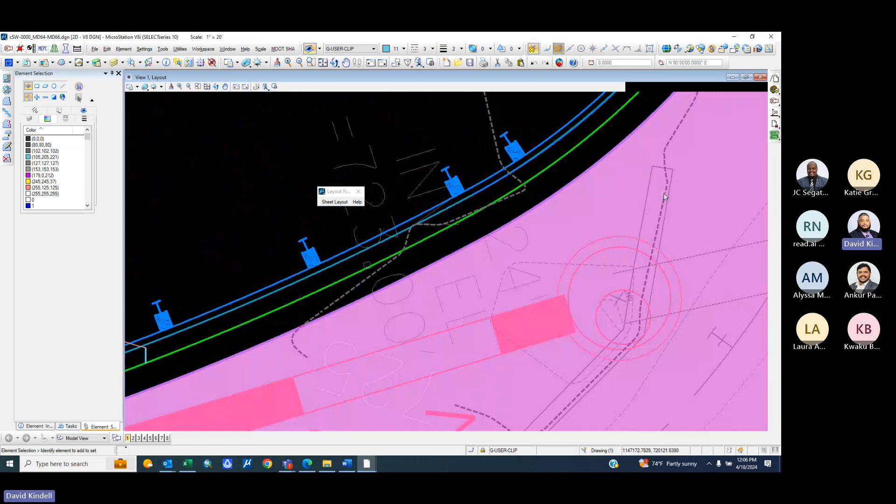So in proposed condition, we're adding a 5-foot shoulder here, and because we're adding pavement here, this existing headwall has to be removed. So we need to figure out how we're going to get the runoff from this road into this microbioretention and into the storm drain system here. Okay?

And so we need to do a pipe system connecting this here. So we added a curb opening inlet here to get the runoff coming to here. Okay? And then we have added inlet, manhole, and pipes to connect to this system here.

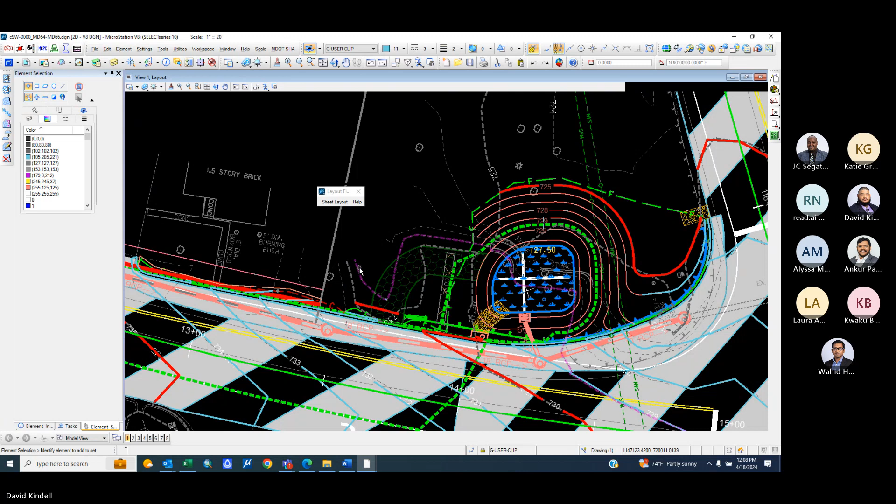So for concept, really all we do is just assume a pipe size. We just throw in the pipes, and that's it for concept. But when we get to the next submittal, we have to draw profiles and make sure that the pipe will actually work. Okay? So the quickest way to do that is using the Power InRoads drainage database. Okay?

So first thing first is you want to work in your InRoads folder, okay? And you want to create a DGN file inside the InRoads folder. This is the file you're going to be working in Power InRoads. Okay? So as you get to the next step of design, you will open it up in Power InRoads.

For now, not everybody may have this software on their computer. Everybody in Water Resources should have this software installed on their computer. If not, please talk to IT about installing this on your computer.

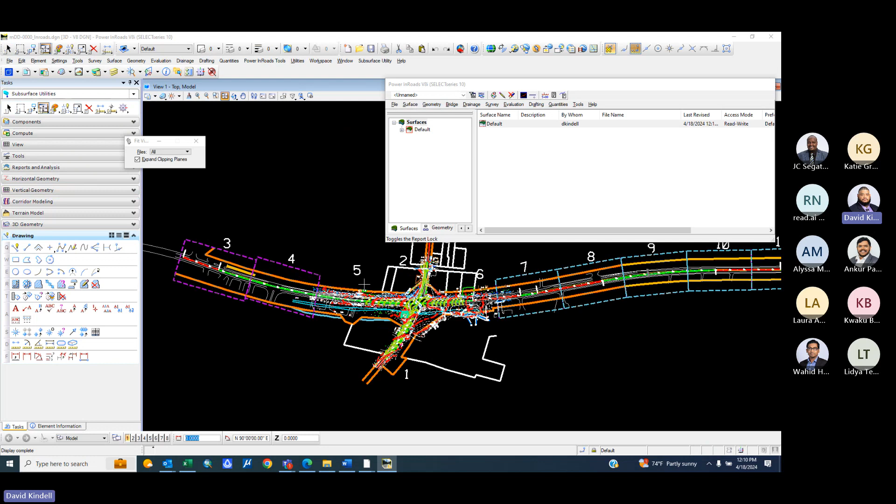Alright, so here's the Power InRoads software. What we want to do is reference my layout where I have all my storm drain system in here, just to see what it looks like. Okay. So this is the pipe here.

Now, first thing first, you need the resources required to design this profile. So you want the DTMs for both the proposed and existing surface. So I have this existing DTM already. Okay, let's see. I'm on this proposed DTM, and I want the existing DTM, which is here.

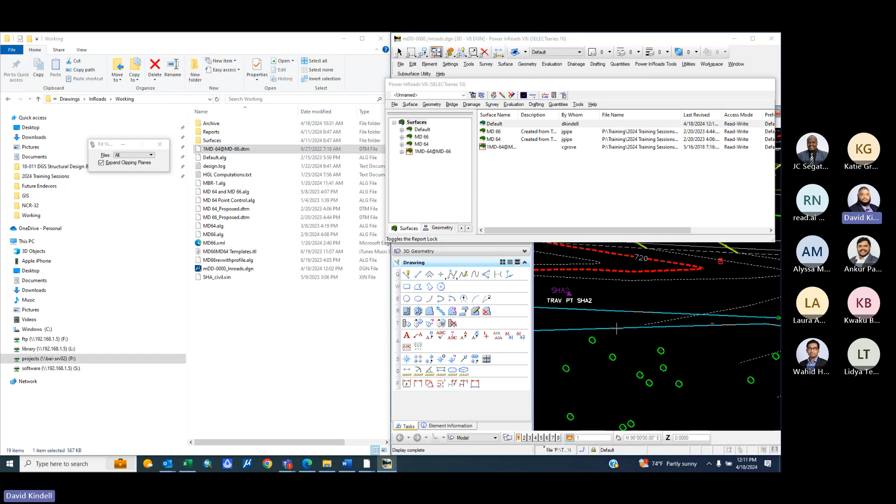And I see I have it in here. And I want my microbioretention DTM in here as well. So it seems like these are more recent DTMs here. But again, we can check and make sure by using the tracking tool.

Alright. So now that we have all my DTMs in here, the next step is to make sure you have the right preferences loaded. And the way you do it is go to your project options tool. No, not project options. The project defaults. And make sure that you have your XIN drainage

preferences, which is the SHA XIN, and your drainage structures DAT, which has the Maryland SHA structures. These have all the structures that you need in order to complete a profile, which I'll show you in a minute when we get to it.

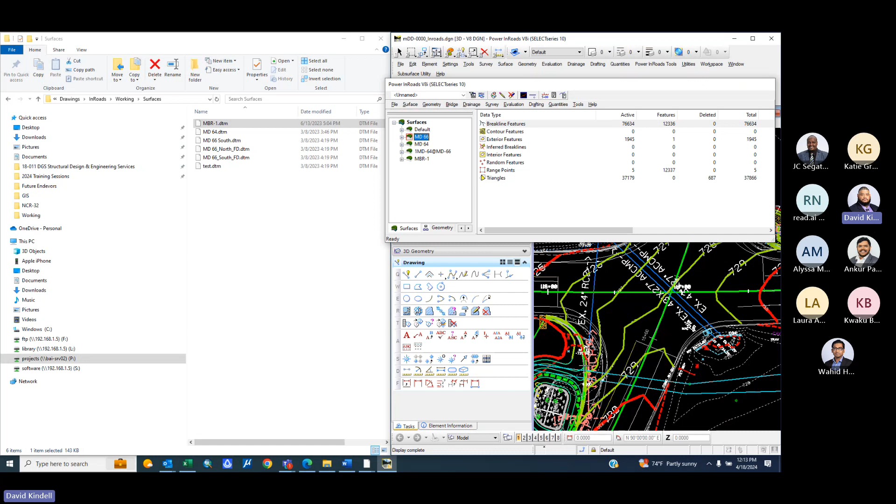So first thing first, when you put in a layout and you're connecting to an existing pipe profile here, you want to make sure that you're getting this entire system laid out in your profile, just so you can ensure that you are doing the profile correctly. Okay. So usually I start from the bottom, the downstream end, and then work my way up.

Okay. So the next thing to do is go to your drainage toolbar, okay? Drainage. You have all these pipes in here. You want to create a new drainage structure.

You want to save drainage data, open drainage file, and do a new drainage file, what they call an SDB file. Drainage data database, say Maryland 66. Storm drain. And click apply. Right. And now you can save drainage data. It's going to be an SDB file.

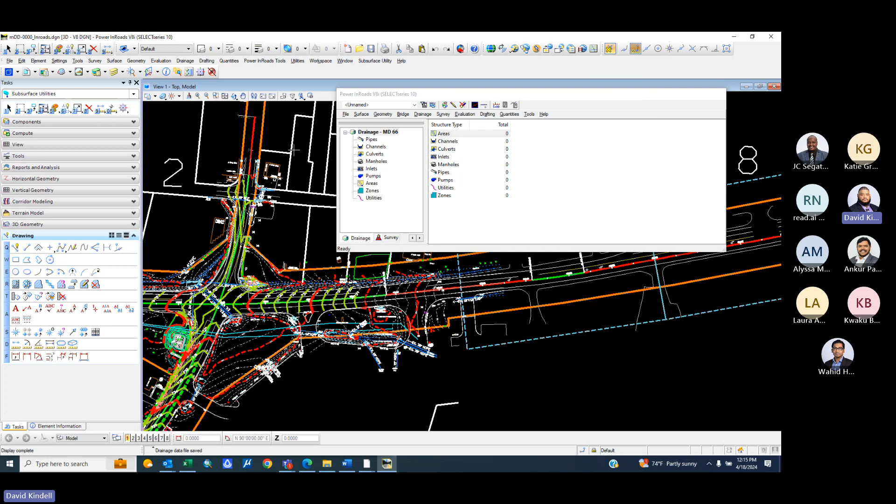So you want to go to drainage, layout, and into a pipe location. So this is your, okay, let me back up. For the purpose of InRoads, you don't want to go downstream to upstream. You want to start from upstream to downstream because your pipes start at your first pipe, and that's how you want to do it.

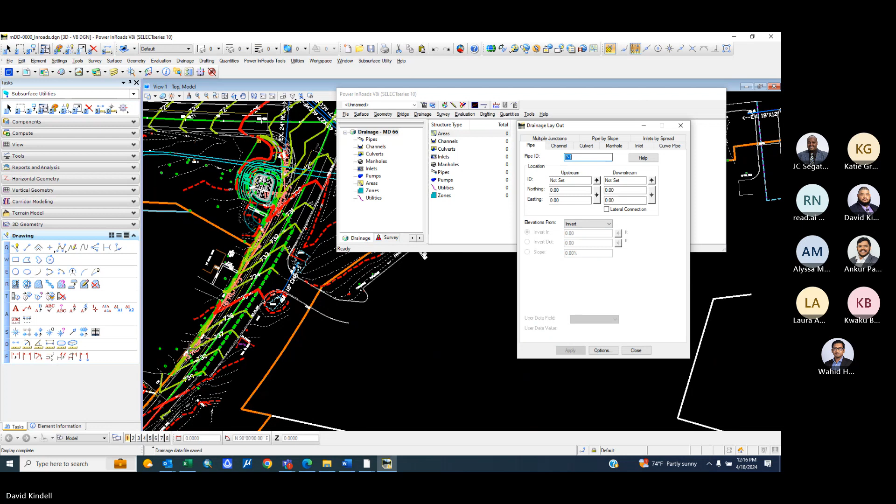Now, usually what you want to do is you want to start with all of your structures first. So you have an inlet here, manhole here, a manhole here, manhole here, inlet here, okay? So here, this is the curb, this is the curb opening inlet.

The curb opening inlet. So you want to go to this inlet here, I1, northing and easting elevation. If you click on this button here, it will automatically apply the elevation of the curb inlet. But you have to be careful. You have to make sure that your proposed surface is selected, not the existing surface, the proposed surface. It will choose the elevation of the surface. So if you click on this, it automatically chooses the top elevation of the structure.

And then the next thing you do is you go to options and you choose the type of inlet you want. The curb opening inlet, okay, class. It's gonna be a curb on-grade inlet. Let's see, a box. It's usually a 4 by. Now this 6 inch or 8 inch talks about what the height of the curb is.

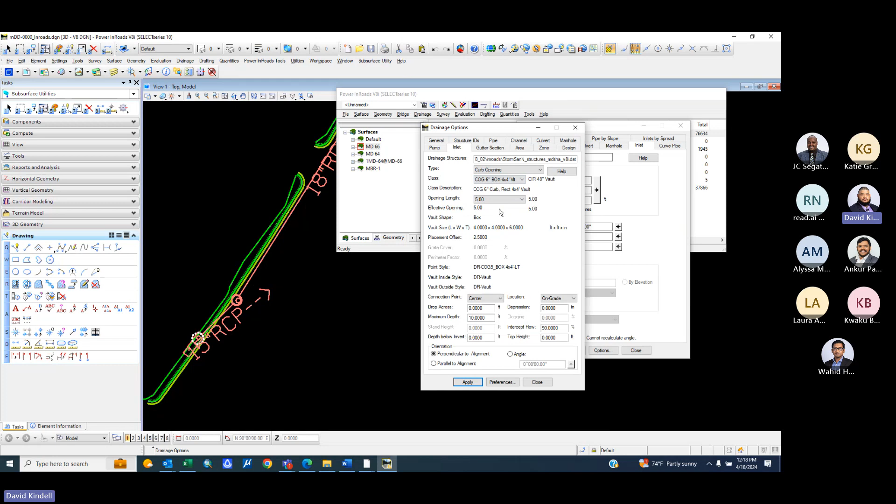Now for this height of the curb, I'm assuming that it's going to be a 6 inch height. I'm gonna choose a 4 by 4 box. And then I'm gonna choose my opening length here. So it seems like it's a 10 foot wide inlet. So I'll make my opening length be 10 foot. Now remember all the information is from the DAT file that I showed you earlier when we did the preferences, which we have in the library.

Okay. So you want to do that about a particular alignment. And then the location is on grade. And the depression of the inlet, usually it's like 1 inch depression. The flow, you can leave at 90%. Okay. And then you just click apply. And it should show up here. Click apply and close. And then you click apply. Okay, that's your inlet here.

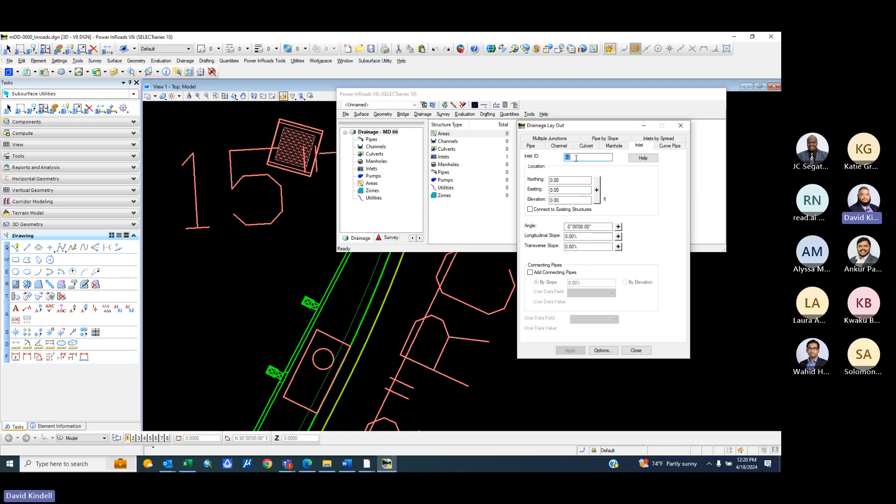And then now you want to do your manhole. Either your manhole here or your next structure, the inlet here, so you don't keep changing your inlets back and forth. Now the way to check that you actually applied it is to go to your drainage and you see that now you have one inlet here. So let's keep going. Let's lay out. Now you see that it automatically goes from I1 to I2.

Now this inlet seems like it's in the micro-bioretention area here. Let me see. Which is right here. So it could be just the top of this inlet that they contoured. So you want to choose the right surface, set active. And usually this is a yard inlet in the micro-bioretention. So we're just gonna go here

and that's one thing. But I'm using the wrong inlet. But you can change it to say a grate inlet. No, it's not a grate inlet, it's a precast yard inlet. 2x2, center on grade, then you click apply. So now it's a yard inlet. Okay? And then you close. And now let's work on our manhole.

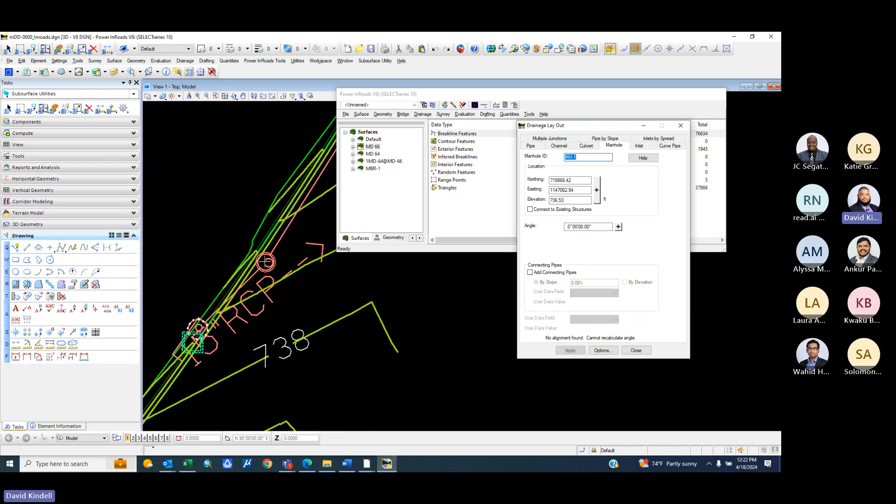So layout, go to manhole one. Again, you want to use the right DTM that's active. You want manhole one, which is here. Option. Let's see, circular, standard. It's usually like a standard. Well, I typically use a precast manhole. Apply, and then just apply.

And then you have manhole two, which is here. You click on it, apply. Now, once you choose your manhole, it will be chosen automatically for future reference. And then you want to go to the other manhole here.

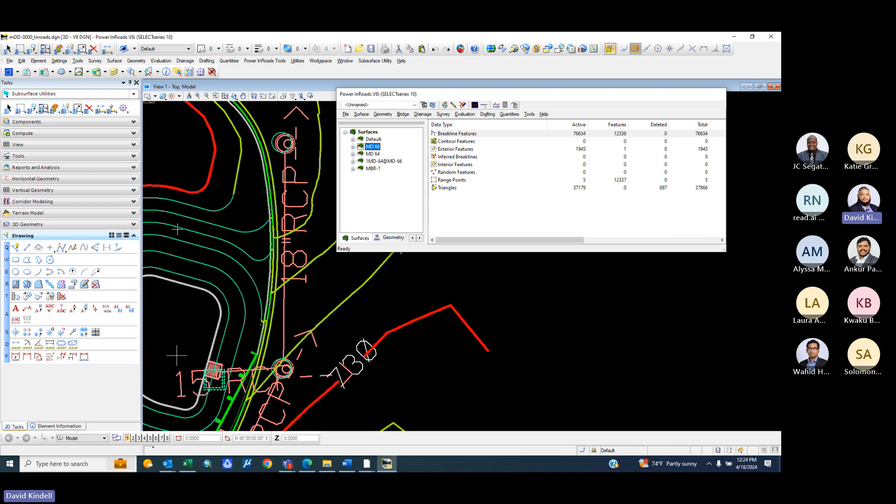And the fourth manhole, which is here, you apply. Okay. So now you have all your structures in. Now it's easy to do the pipes. Okay. So let me turn on all my... So you're gonna do layout, same thing, layout, and then pipes. I want to start from my upstream to downstream.

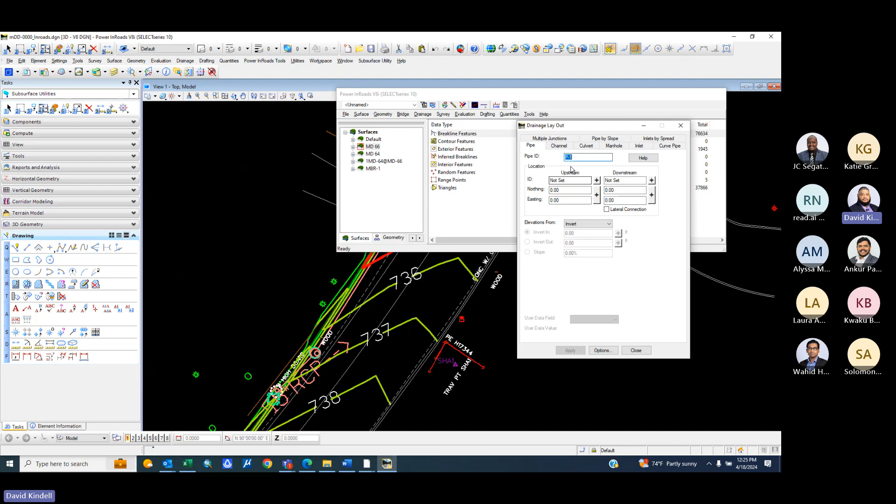So here I have a 15-inch RCP from this structure to this structure. Now the easy way you do that is to select your ID, okay, which is already set. So you have upstream ID, and you select your inlet. It applies to this, and then the downstream, select it, and then it'll apply to this manhole here.

Okay. Now it says the pipe is too large for the structure. So this is a 15-inch RCP. So you have to change your pipe size. So you go to option. It's an 18-inch RCP. So we're going to do 15-inch RCP. Then click apply. Okay, cancel. And then just apply it. And now you have a 15-inch RCP.

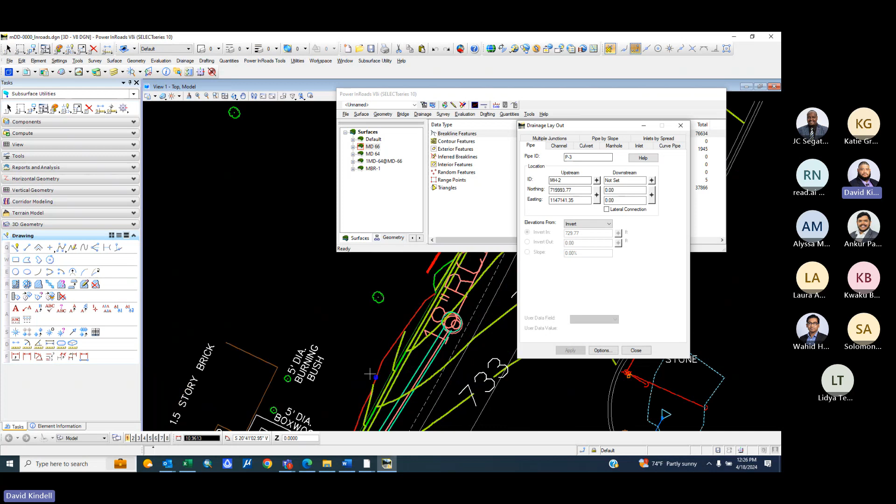Now you notice your next pipe, it will automatically choose your next structure, and it will automatically choose your next invert. So really all you have to do is just click the downstream and then click on your next manhole. This is 18 inches. So this one will be 18 inches. You click apply and apply. Now it automatically selects the next one, M2, the upstream structure of P3.

You select that. Option 18 inches, apply. And then you'll keep going to this manhole here, and you apply. Now that we have this next one, it's your existing 24-inch. What I do is I like to make sure, okay, this is existing. This is existing pipe one.

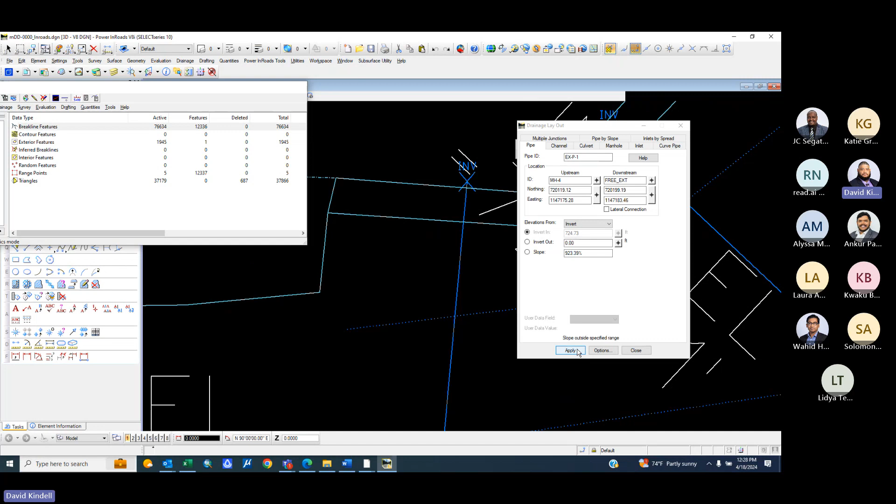And then I want the downstream, there's no structure here. So you can set your elevation, just select this button here. And then you select the pipe or whatever the input is. And we know that this is a 24-inch RCP. You apply it. You could apply 24-inch. Okay?

Now we go back to, let's finish. We have another pipe here as well. So what we can do is the P5 here. Upstream is this I2 inlet, and downstream is this pipe here. And we'll go in option 15 inches, apply, then you click apply there. Now you want to make sure you save your drainage data, then boom, that's okay. So now you have a pipe system here set, okay?

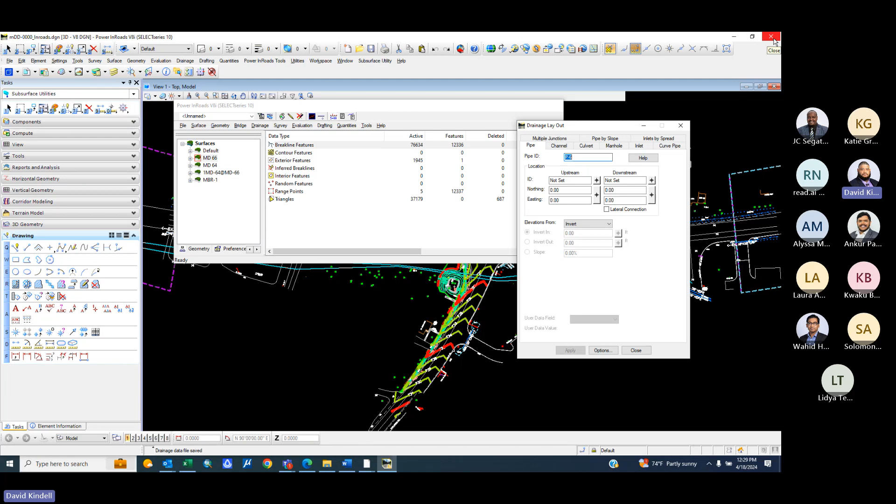Now we got the layout all set. Let's see the profile, okay? Now I have the drainage database set. I like to draw my profile in the MDP profile. So what I like to do is I exit out of this thing here and open up my MDP file, which I already have. And I want to open it in file mode.

Now the cool thing about Power InRoads is that if you keep working on it in the same folder, it'll remember what you opened in the previous session, so you don't have to look for it as you open it.

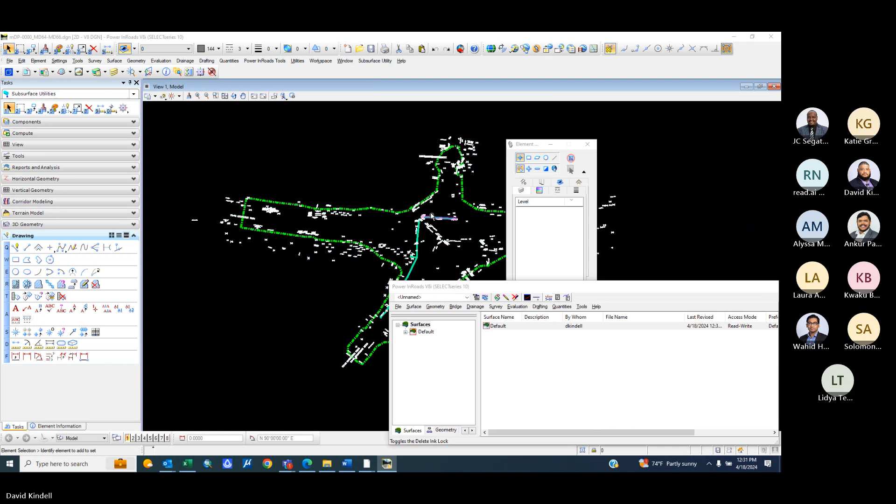So when I'm in my profile, what I like to do is I like to reference in my MDD InRoads folder file. I like to reference in my MDD folder file. Let's see, training session.

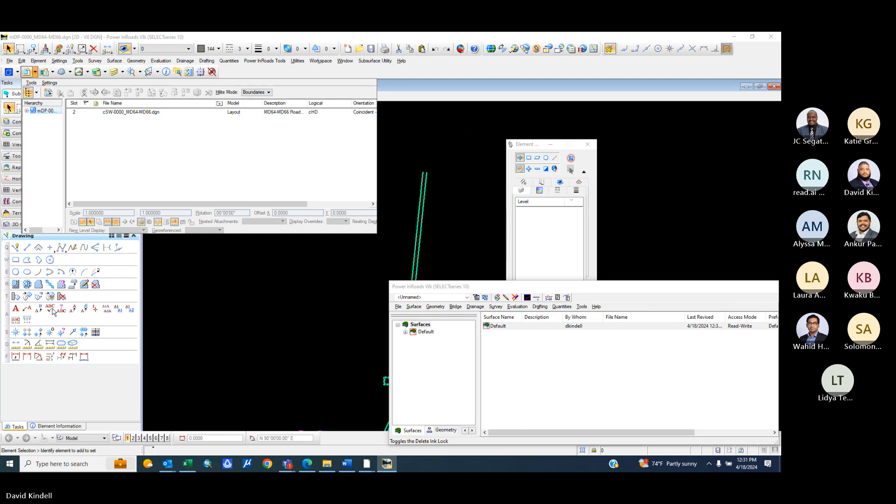Okay. And then I want to open up all my surfaces that I previously uploaded, which you will have here already. From 64 and 66. From 64 proposed. And then I want to open up my drainage database, which I always save here. And InRoads. Open up.

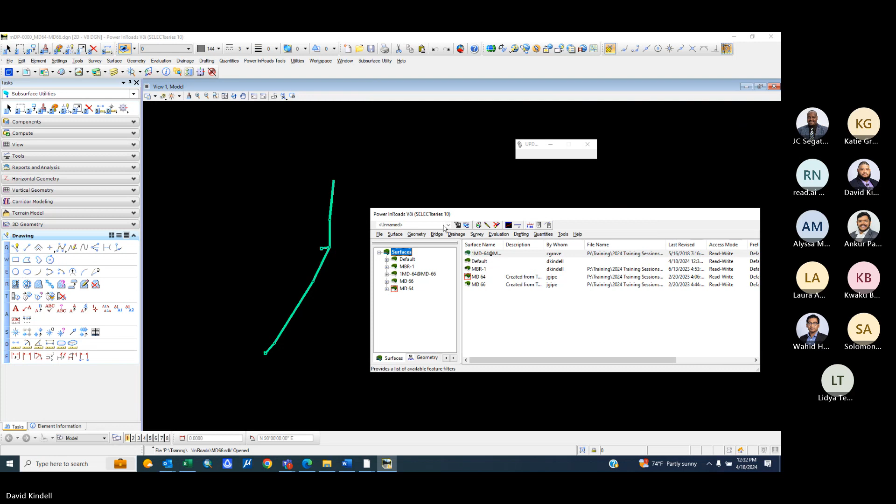So now go ahead and draw this profile. So I want to do evaluation, create profile. Now I want to select all these just to make sure I'm getting all the profiles needed. And then I want to be able to tell the difference between these things. So I go to preferences, I'll load my drainage preference in, and I know all my proposed stuff is here. I want to change the properties of it.

Now 64 is my proposed profile. I want to change it to my surface proposed. I can apply. And I'll do the same thing for 66. I'll go to my surface, proposed surface, apply, and then it'll be done. I change it to proposed. And then for my existing surface, I'll change it to my existing surface and apply.

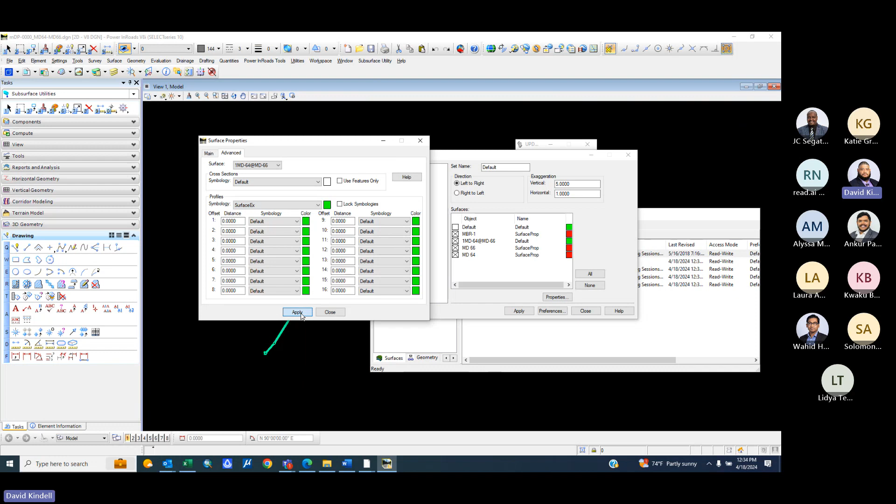And now that I have all my stuff set up, time to go to my source. I want to see my network alignment, and it's going to be from to. So I want to go from the upstream to downstream. So what you do is just click on this. You want to make sure that you have network selected as well. You click on this, you select what inlet you want, and then to the pipe. Let's say the end of the pipe here.

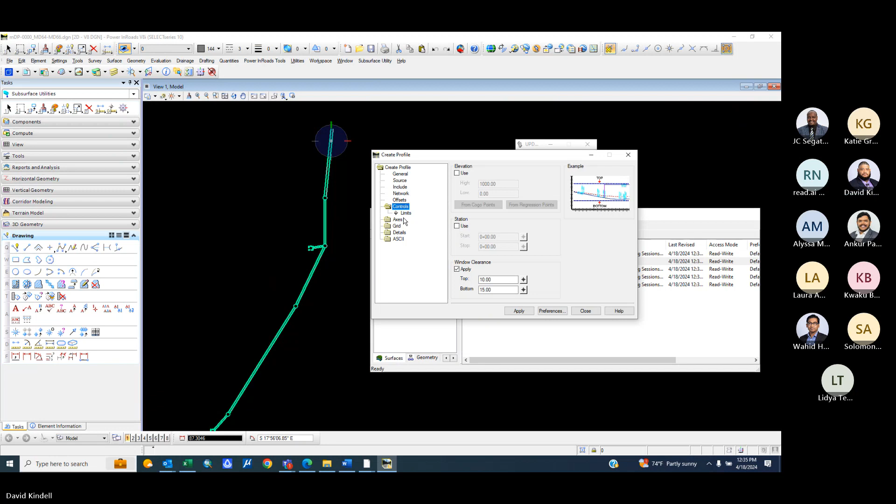And then you want to select your network, include pipe inside, pipe outside, inlet, manhole, pump, any controls. Alright, I think you should be good to go on that. Click apply. And now you just click on this profile here. Okay. So this is your profile here, okay?

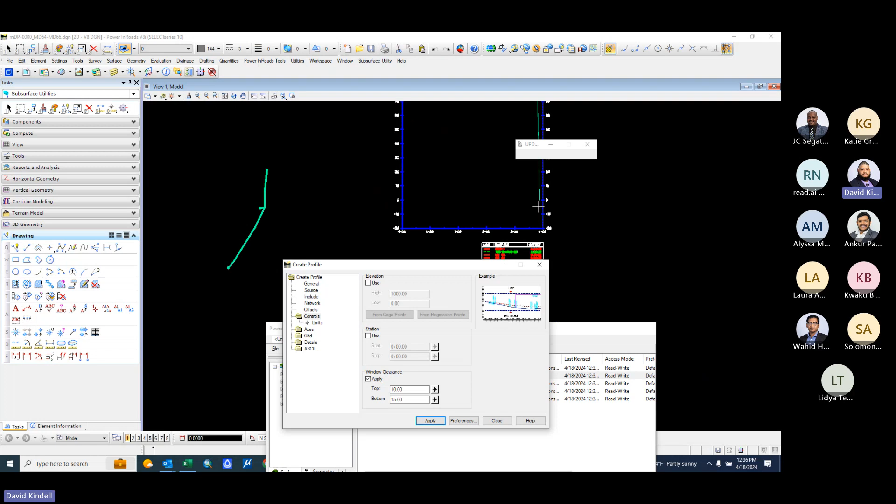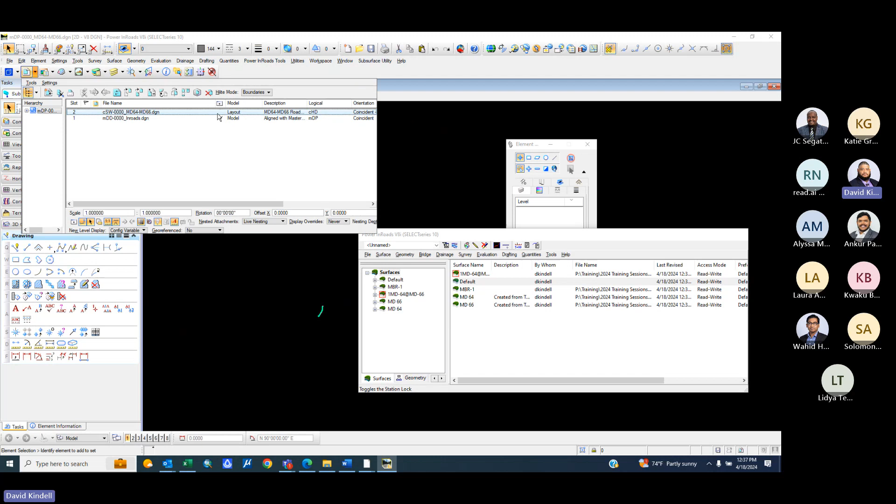Now once you start your profile, you can then adjust your profile. So you notice that this thing here is all the way down to here. That's because we didn't check the elevation of our profile. So once you get the profile here, you can then apply your invert elevation. Okay, so the way you do that is you just delete this on this layout here. Alright, so

when you check out what this elevation here is, this elevation is 721.05. Drainage, go to drainage. Go on the pipe, select what pipe it is. Position, B-1. You right click and then you edit. Now see my invert, 721.05. Right now it's saying that this is 0 to 721.05.

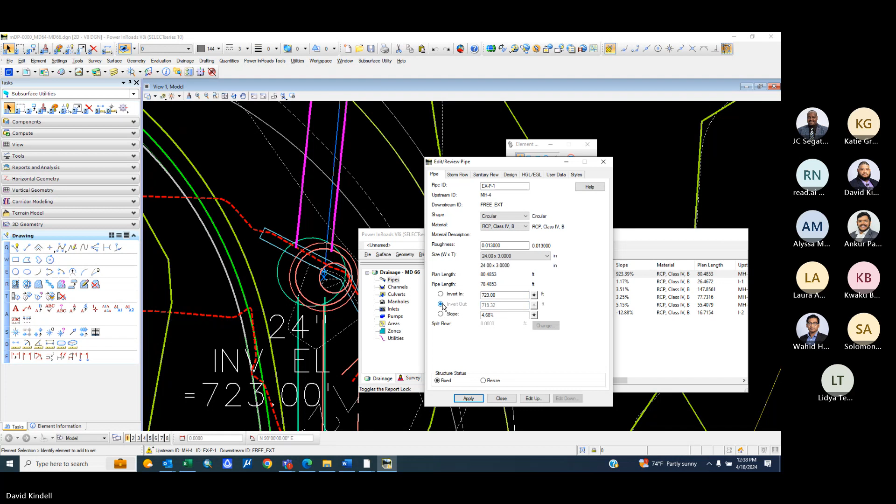But my invert in, upstream in, is 723. Apply. Alright. Now let's try this profile again. Create profile. 5. Alright, now it makes sense, okay?

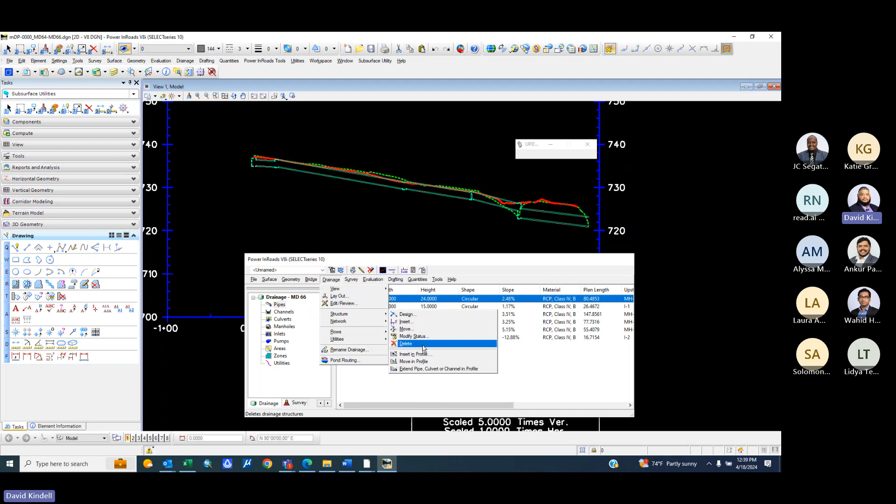Alright, so now that you have the profile, we notice these elevations are probably not correct. But instead of going in manually into editing these inverts, what you can do is you can do it in the profile itself. The way to do that is to just go to drainage, evaluation, profile, and what you want to do is move in profile. When you click on it,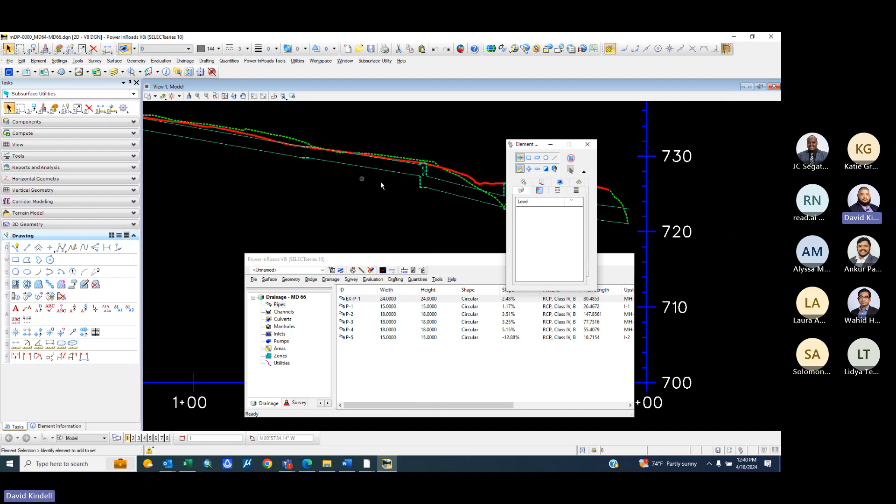you can then move the profile up and down. So let's say I want to move it down a little bit. Okay. Now your profile is down. But you have to remember, usually you want to have at least 1 foot of cover from the proposed grade to the top of the pipe. So what I usually do is I will offset this pipe here by 5. The reason why it's 5 is because if I measure my scale here, it's 5 to 1, so 1 foot equals 5. So I will do it by 5.

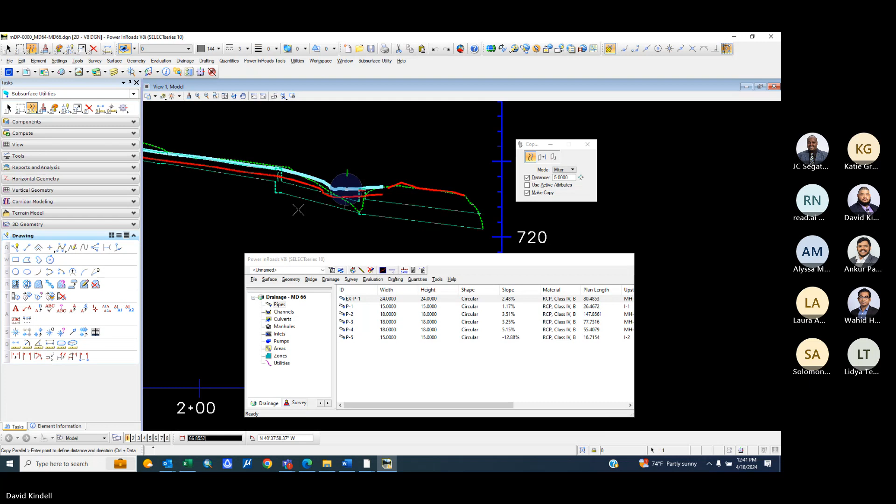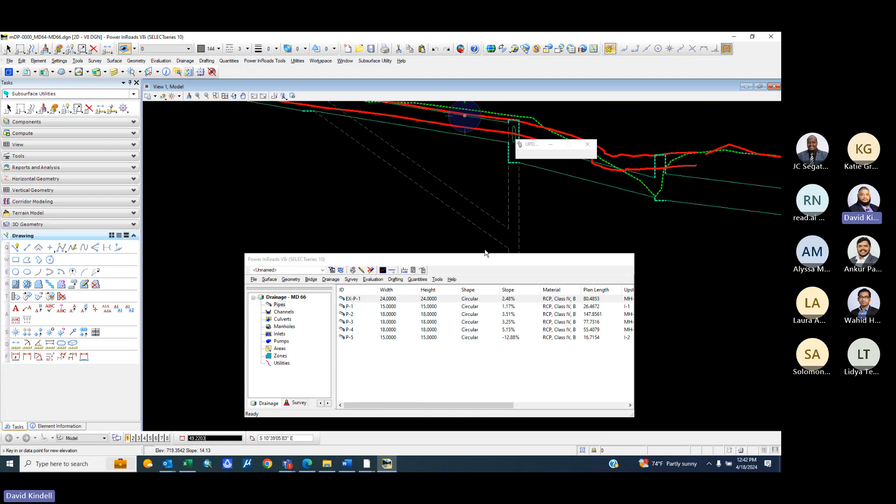Okay. And then what I'll do is I'll just continue to move along this profile: drainage, network, and then moving profile. Click on the profile that you want to move. Double click it. Now you have to be careful, because sometimes if I click on the end, it's just going to move the end of this thing here. And if I click on the upstream, it's just going to move this upstream here.

So in order to move this whole thing, I want to make sure I'm getting in the middle of it here. So it's going to move my whole profile down. So I want to move it down to at least 5. But I want to move it so I have positive drainage from here to here while still being below the cover. I want to turn off my.

Okay. And then you keep doing the same thing. Make sure it's in the middle here. Double click it. This one might be okay. Might be okay for here. And then here you double click on this thing here and move it down. Okay.

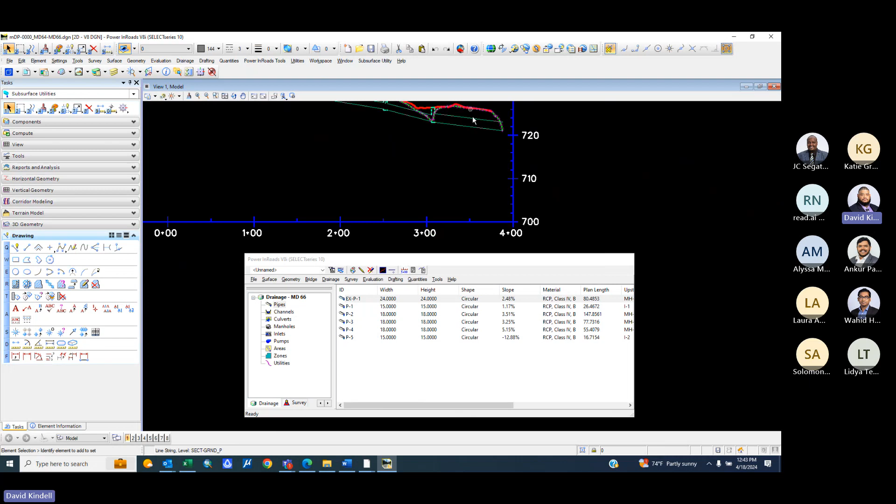So that's how you can adjust your elevation here, and then it will automatically update your slopes here as well, and your length and your invert of the pipe. It'll update your inverts automatically, and then make sure you save the data. Save drainage data.

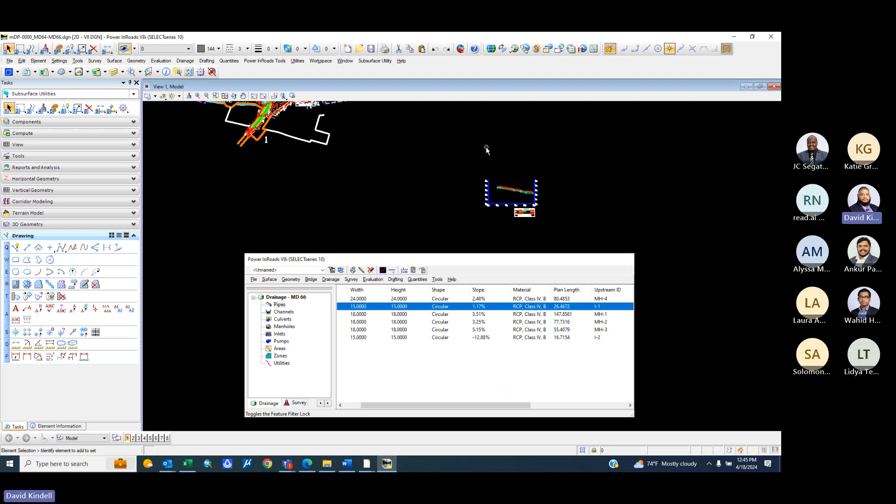Okay, so that's how you do that for the pipe profile. Now the next step you do is you have to add the hydraulic grade line to the profile. Now, in order to do the hydraulic grade line, you have to know what the flow is. So in order to do that, you have to know how much flow is being inserted into these pipes here.

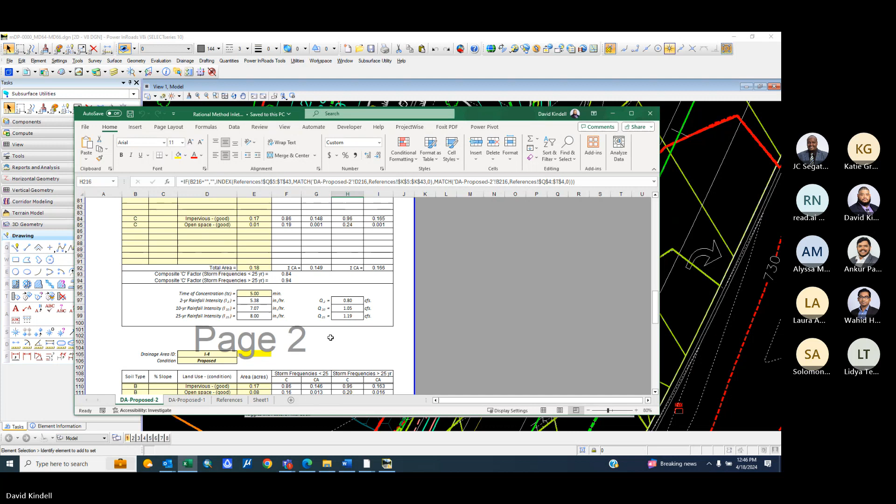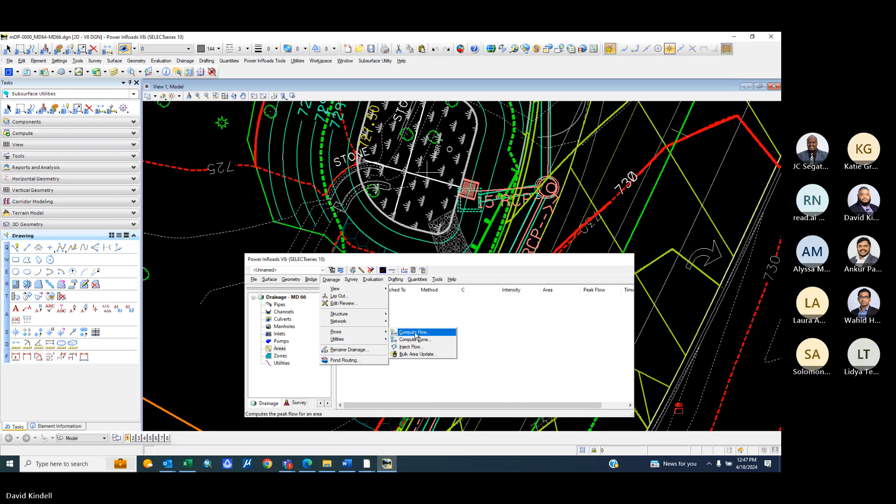Now, in order to apply this to your inlet, you go to your area here. One inlet. See drainage. For drainage layout. Where is it? No, that's not... flows, okay? And then you compute flows. So you have the area ID A1. So in this area, we know I1 is 1.75 acres.

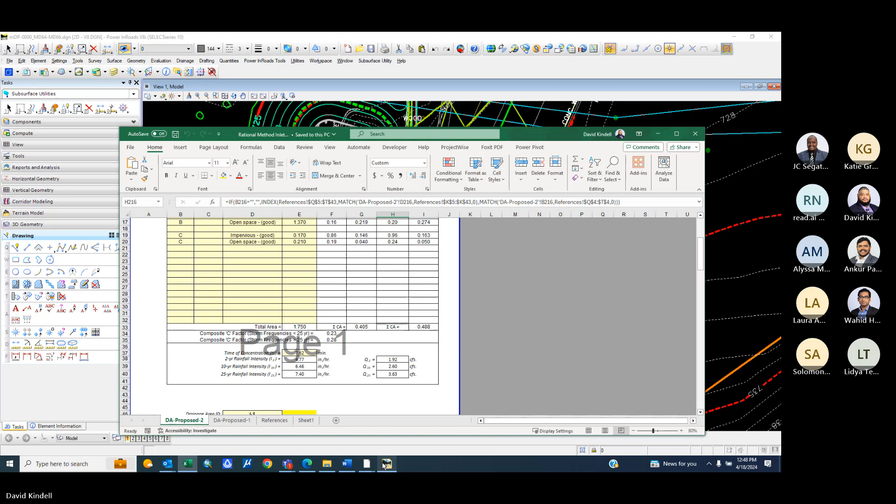The runoff coefficient for less than 25-year storm. We're going to choose the 10-year storm here. It's 0.23. And time of concentration, 7.62 minutes. And the rainfall intensity should be matching what the 10-year storm is. For 10-year storm it should be 6.46. Equals 6.46. All right, 2.60 cubic feet per second.

And then you click on which inlet you want to attach it to. So you click on this inlet, the inlet that you want to attach it to. And then you click apply. All right, and then you close. Now it should show up here, okay. And so now you want to do this other flow, compute flow for A2.

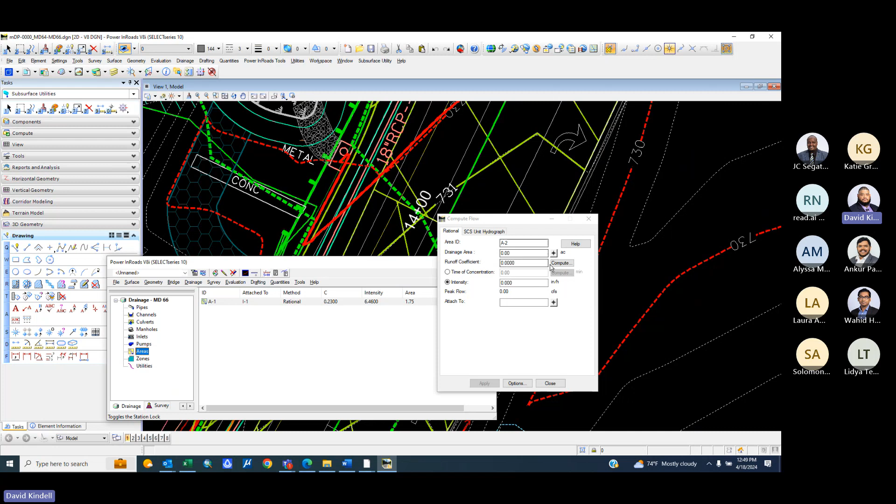Now another way you can do this is you can also choose the drainage area boundary. It should work if you click on the drainage area boundary here. 0.22. So if you already have the drainage area drawn in your MicroStation file, it's just easy to click on it. And they automatically apply it here.

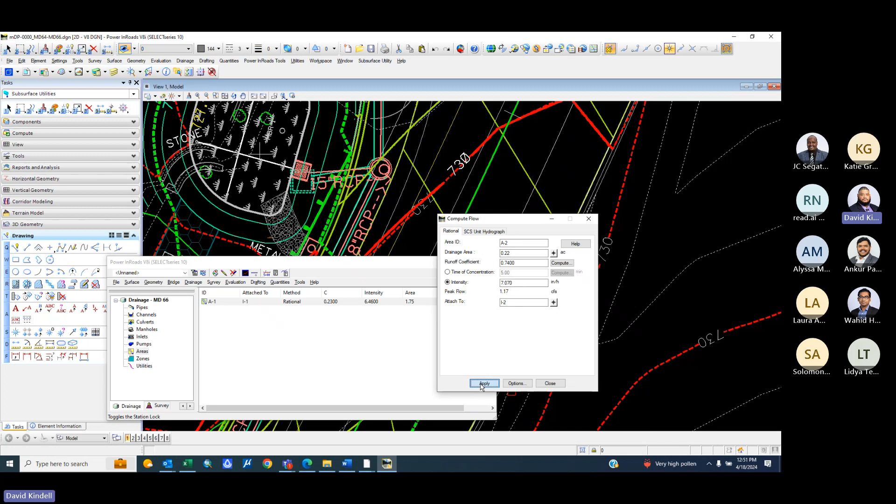So let's see what the runoff coefficient is. 0.22, 0.74, and the time of concentration 5 minutes. And then the 10-year rainfall intensity 7.07. It's 5 minutes. Rainfall intensity 7.07. Then you click apply. See which inlet that you want to apply to. And click apply. And close.

All right. So now that we have our area set, we have one profile, but we're missing another profile here, which is this I2 inlet to this manhole here. So to make sure we do it correctly, I want to make sure this profile is okay. Profile, create profile, and choose my source. Just change my source from here.

Now I can just use this manhole here, but I always want to use this pipe here, so the profile extends longer than this pipe. If you choose this manhole, the profile will usually stop at the manhole, which I don't want to do. I want to just click on this pipe here. You click apply.

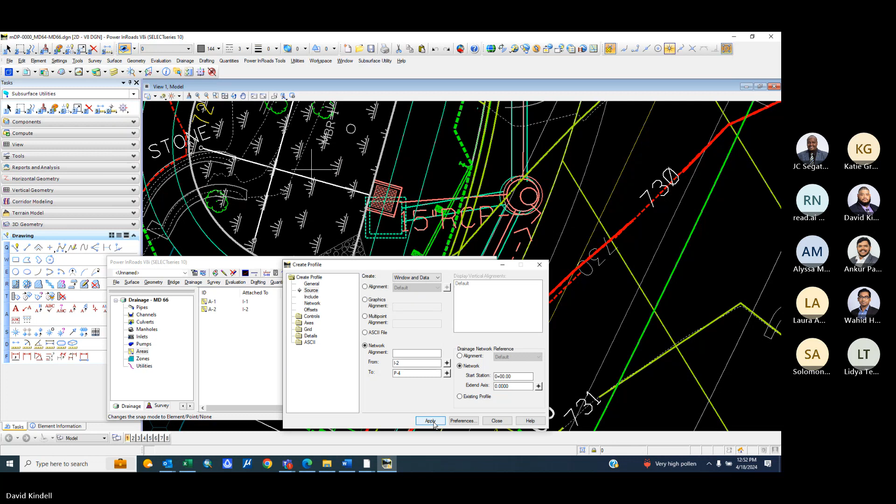Okay, now there's something wrong with this one here. And so that means I have to adjust this one. Not structure, moving profile, I need to adjust it so that the invert is more upstream, and I have to adjust this invert more on this one. And also you can move the top of structure here a little bit as well. So the top of structure can be increased a little bit.

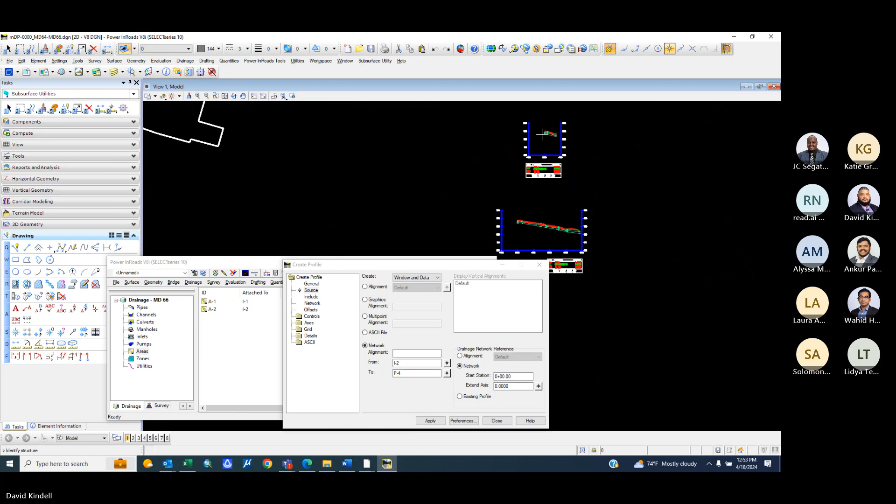So you can just click on this top of structure here. Let me see, structure. But you can move the top of structure here, so you make it up a little bit. And then just move the profile down like that. And then you make sure you always save the drainage area.

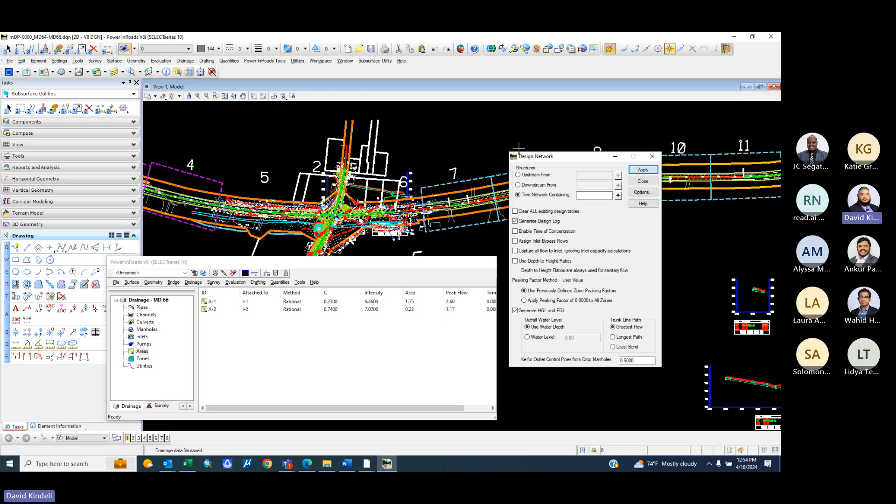All right, now the next step is, okay, we have these flows. How do we run it? How do we get the HGL here to show up? So what you want to do, you want to go to drainage, network, and then design the network. Upstream, downstream. But usually I put the tree network containing my entire pipe network that I want to select, and I choose downstream of my pipe system. So I want to choose my pipe system, which is my downstream.

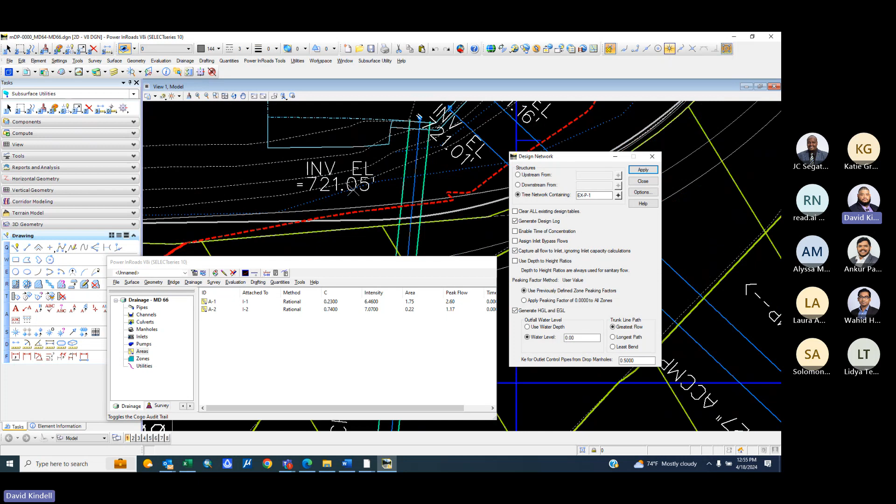Okay. I want to capture all flow to inlet, select that. Then I want to select generate HGL, generate the path of greatest flow. And then I want to choose my water level. This is where your HGL will start. And here, what I usually do is I choose the top of my pipe at the downstream end. So if my invert is 721.05 and it's a 24-inch pipe, the top of pipe is going to be 723.05.

And then I just click apply, and it will spit out your HGL table and your HGL computation. Okay. Now you can save this, but sometimes it might change. So I will rerun it again to make sure until it's final. And close it.

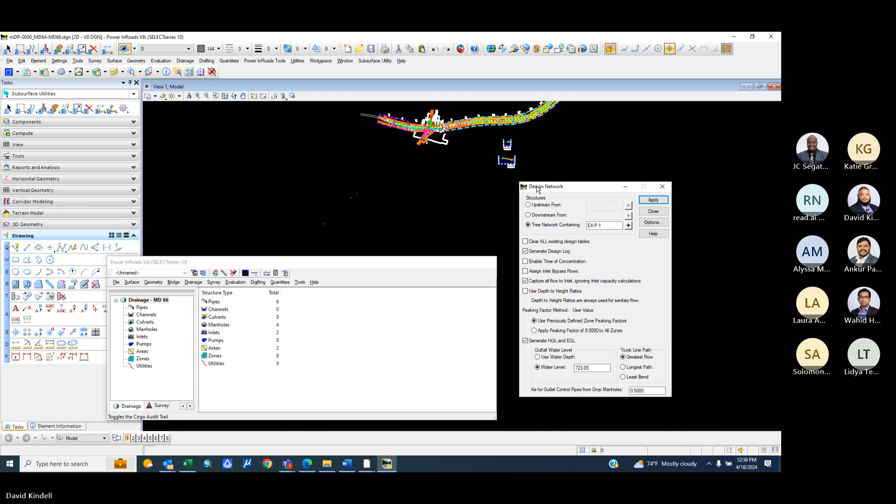And now what you want to do is go back to your profile, right? What you can do is go to evaluation profile. You can update drainage profile. Select the drainage profile you want to update. And then you want to do update HGL and EGL, and you click apply.

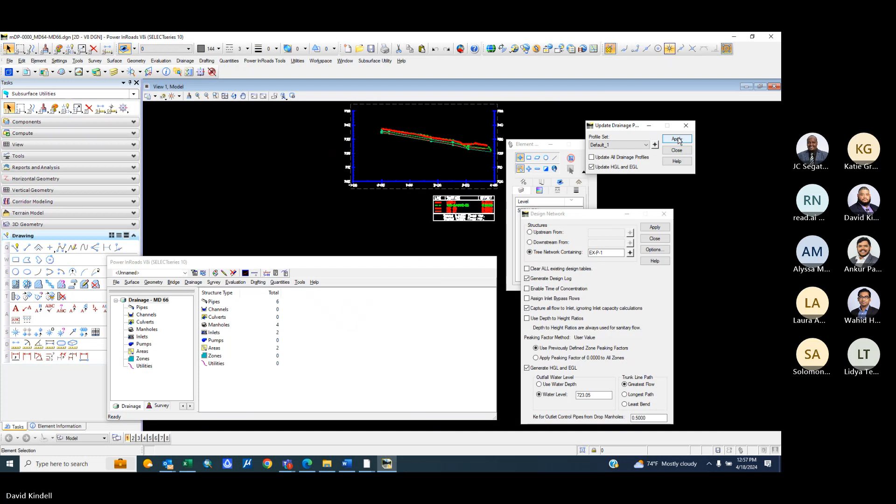Now your HGL will be shown. I think the red is usually your HGL. And then you can do it for this one, select the profile here. Update it. Now you see that's your HGL here. So now you have all your HGL here. Okay.

Now the next thing to do is, let's look at our agenda. Again, you want to save it. Let's look at our agenda.

Hey David, I have just one question. When you calculated the flow, is it the same result as the one which we have in the spreadsheet, the 10-year discharge? Yes, it should be. Okay. Because we are submitting also the spreadsheet, the calculation from InRoads and the spreadsheet, I just want to make sure it is the same or close. Yeah, it should be the same or similar.

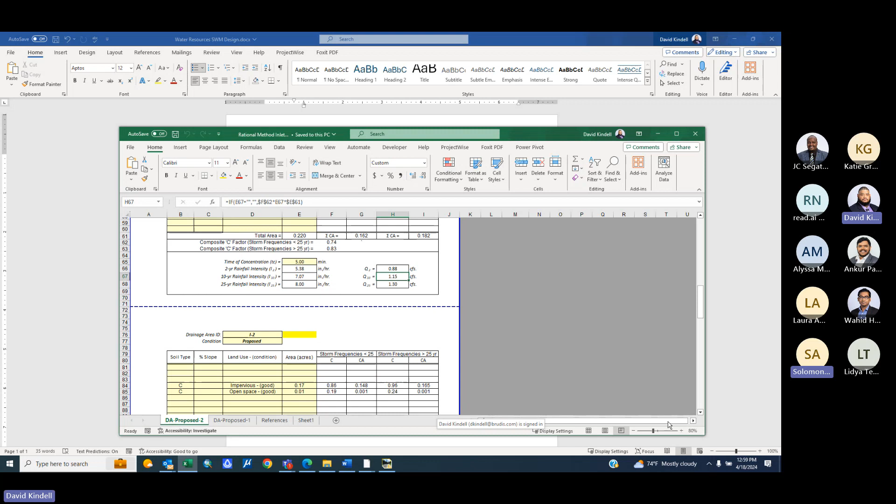For area 1, we have 10-year 2.6. I have 2.6 here, okay. And then area 2, 1.15. It was 1.17, 1.15. Okay. Close. Okay. Thank you. All right.

Okay. So the next step is to annotate your profile. Now, before I learned it, I was doing it by hand, which took a very, very long time. But I spent some time learning how to use this software so it'd be easier for me to annotate my profile. So the easiest way to do this is to go to evaluation, profile, and then annotate drainage profile. All right. Now your pipes and structures.

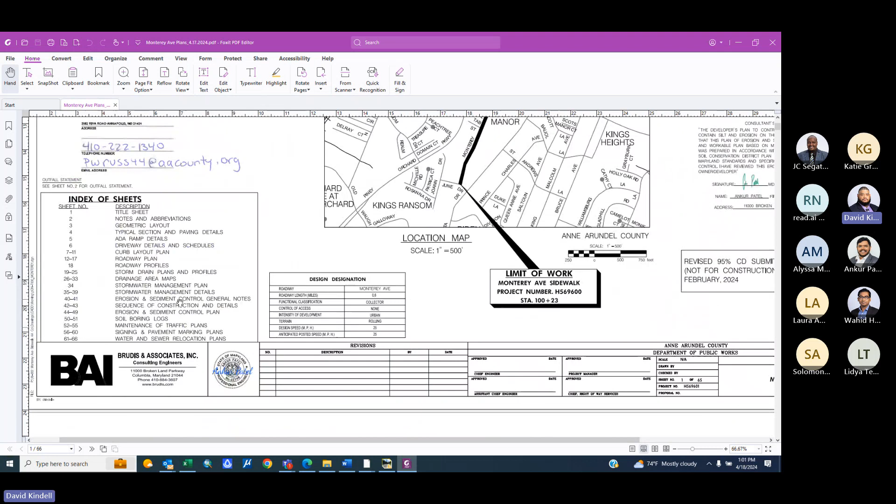Now what you do, you can look at other older profiles just to get what the annotation should look like. And so I might go to an old profile that we did, like Monterey Avenue. Let's see, go to storm drain profile. Okay.

So this is the annotation. On the top, I followed it Q10, V10. But for me, I like to put the material on top. So let's get started with that. So we'll work on this profile here. So the pipe here, and you want to click on what you want to show. So you have material. I don't like to do pipe flow. And I don't like to do the width.

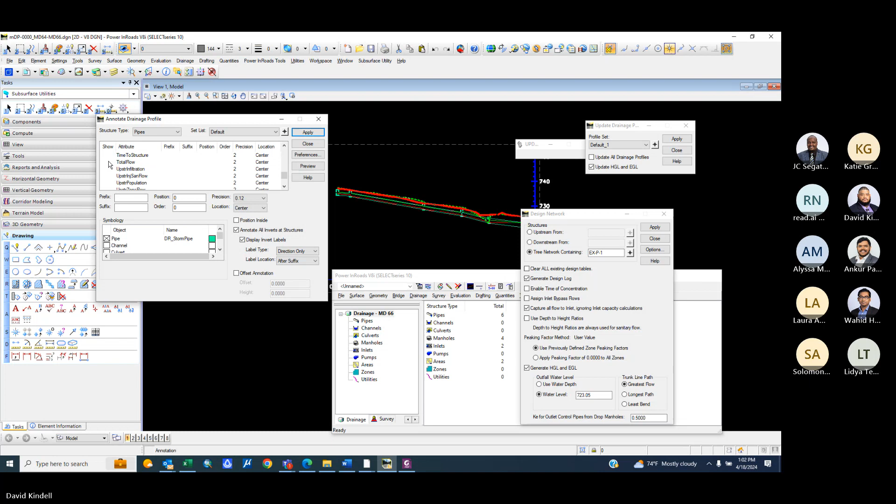I like to say, okay, I want to see my invert in, my invert out, my pipe length, my size, height or width. I go to size width. And then what else? My total flow, and I select my velocity, and I show it.

Yeah. Okay. Now you can click the preview to help you set it up a little bit. So right now it looks like this if I were to annotate this, and the way to fix it is to change your position. Now it's all in 0 position. So if I would change my position to, let's see, 1. Now my position is at 1.

So right now I want my material, my size, and my length all in one place. So I want to do my pipe length on level 1 and my size on level 1. When I have pipe length here, I want to make sure I have a prefix and suffix. The suffix tells you what you want to put after it. So the size width, after it I want to have it in inches. So I'll put the inches in here and click apply, and then okay.

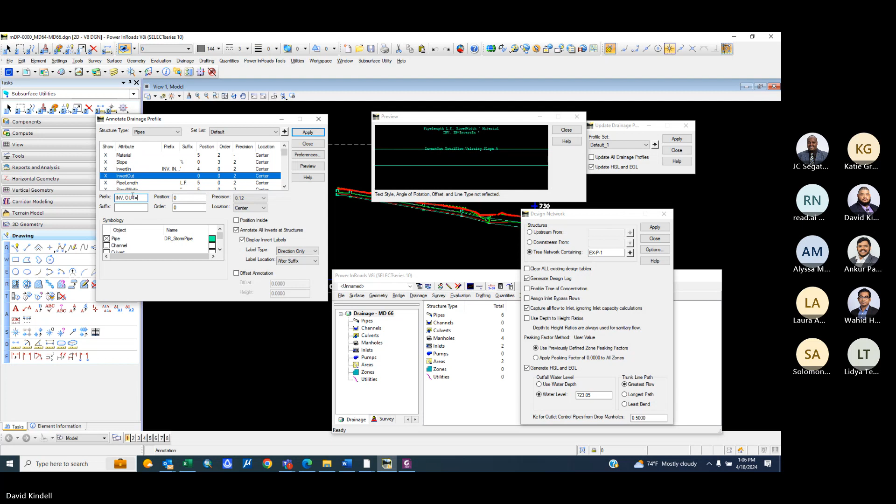Okay. Now for my separator I put feet, and I'm doing invert out equals, and then feet. Now change my order to 3. And then what's next? I want to do my total flow and my velocity.

My total flow, I want it in position 2. My precision is going to be 0.01, and then my suffix is going to be in cubic feet per second. And then my velocity, I want it in position number 1. And my precision is going to be 0.01, and then it's going to be feet per second. And then I have my slope as equals whatever percentage slope it is.

Now, this is what it should look like. So when I apply, I choose the profile I want, pick this profile, and then I click apply. Oh man, it doesn't look right? It's all weird and everything. So how do I fix that? I just want to do an offset annotation. Let's try 10. Now it's all the way down here. So let's just do 5. Apply.

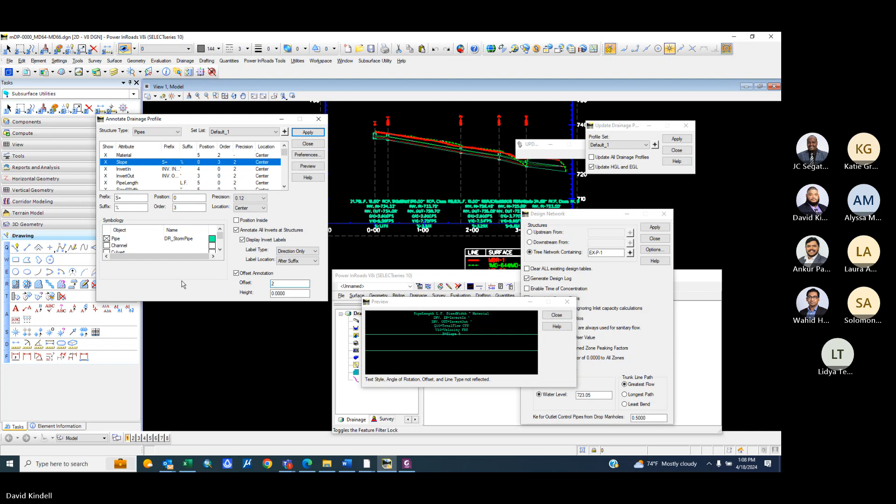0. So you want to set the offset annotation to 0. Now you can adjust it as well. Now you notice I don't want the inverts here. You notice you have a space here. I don't want all this. I want to go back to my pipe. Now I want to change my precision to 0 for my invert and my width. My size width, I want to change it to 0. If you apply, it will change your width here. RCP class 4. And then you can change the annotation offset, or I have to do -10. Okay.

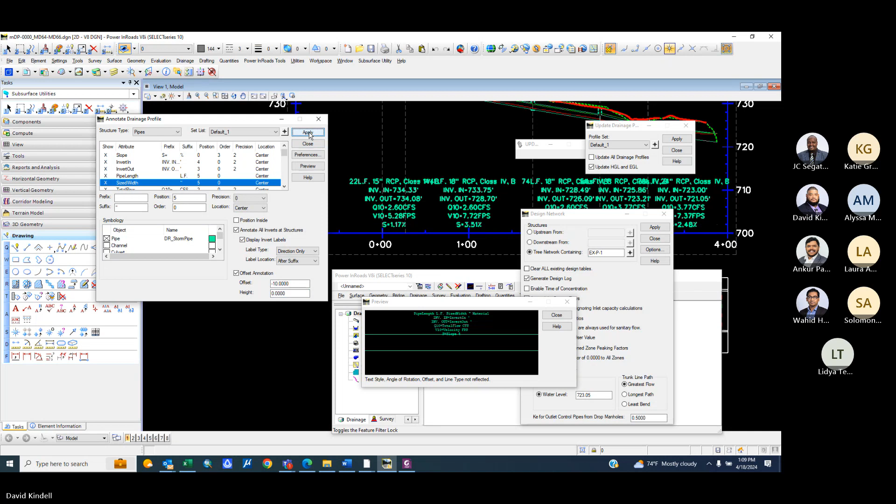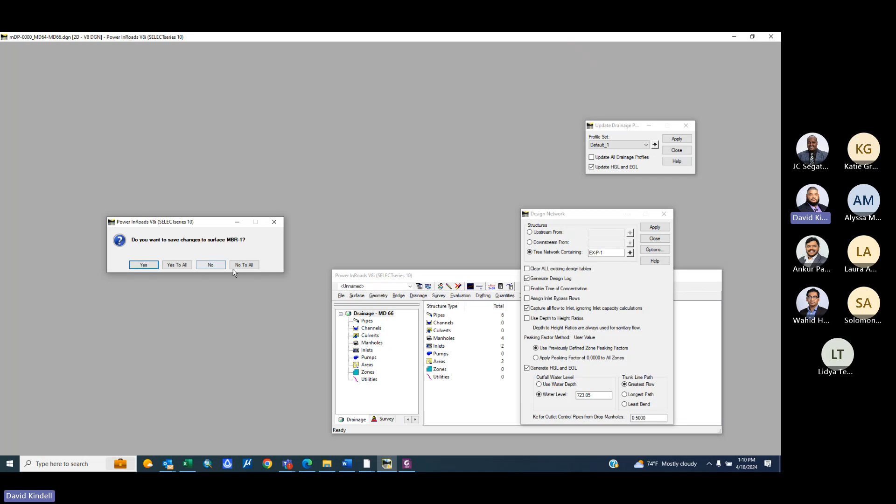So you're now labeling your structure IDs, your flow, velocity, and everything. And then you can select a different profile and just apply, same thing. And then boom, that's it. That's all you have to do to annotate it. And then you just save settings. Make sure you save settings. Save it. And then I like to close this out. I didn't make any changes to my surface. No.

Now in profile, all your text should be Leroy 120, which is the standard for BAI annotation, which is also in the CAD manual. It should not be anything else. Like, you go here. Let's see what it is. SSA. Well, that's the old one. There's a recent new one here.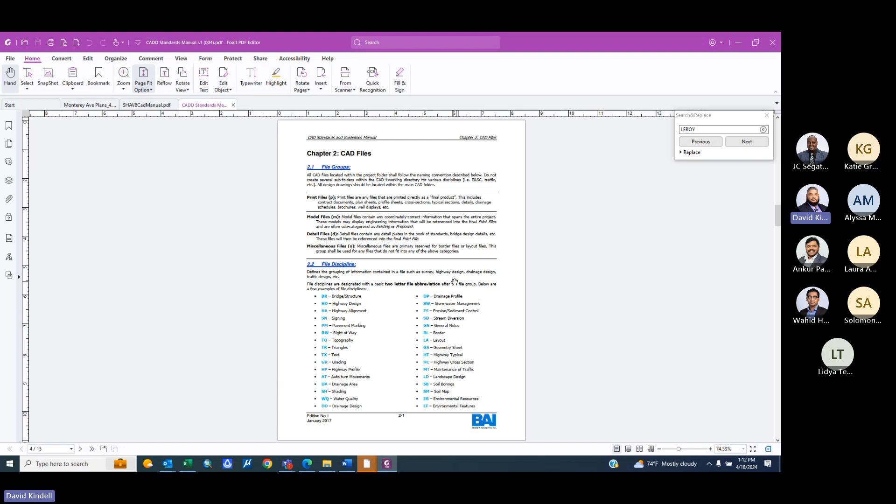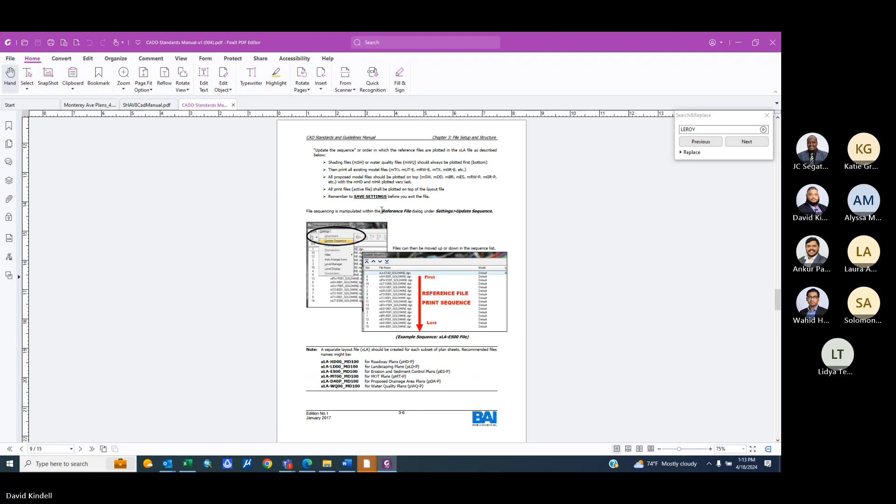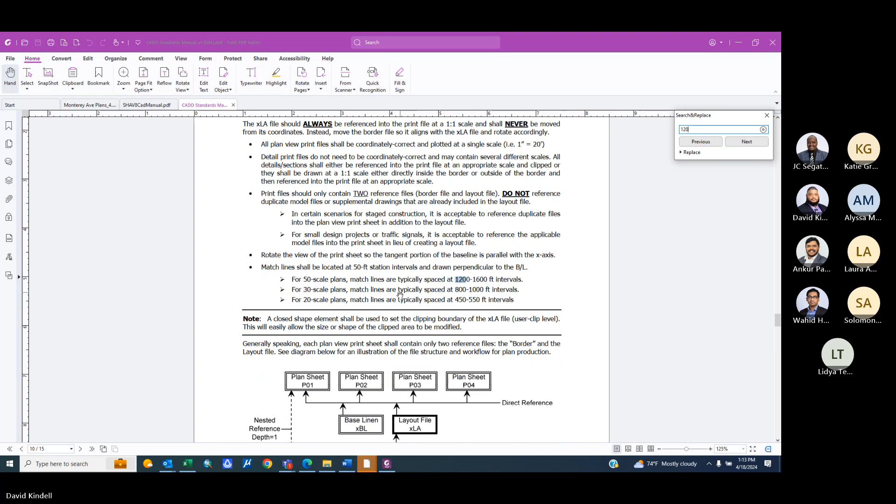So all your text should be, let's see, Page Fit. CD one. General text should be 0.12. Interesting. Call out. All those should be 0.12, which is 120. Okay, 120. So let's open up my profile.

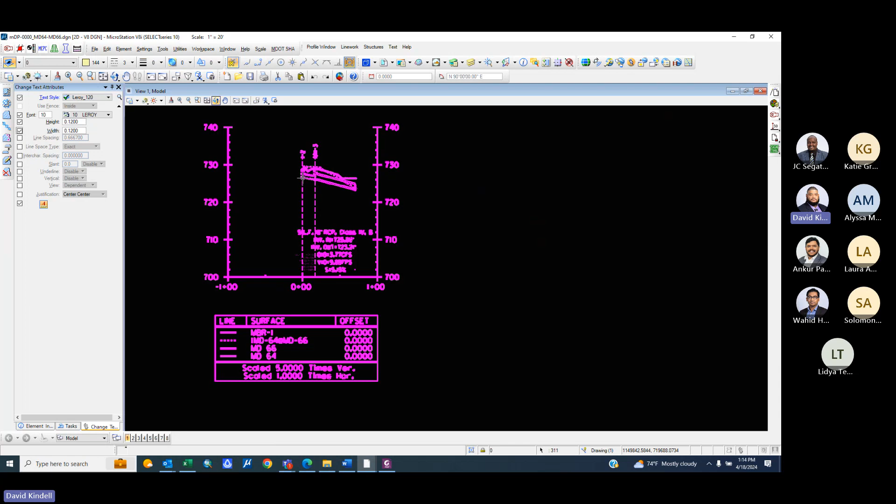Okay, now it's looking kind of ugly, so I want to select this. 1 equals 20, I want to select this thing here. Right now I have no style applied. I like to use Leroy 120. Make sure it's annotative, so that it's 20 scale. And then I select this whole profile and go to Change Text Attributes, and match the whole profile to the Leroy 120 annotative font. And then it'll apply all my text correctly.

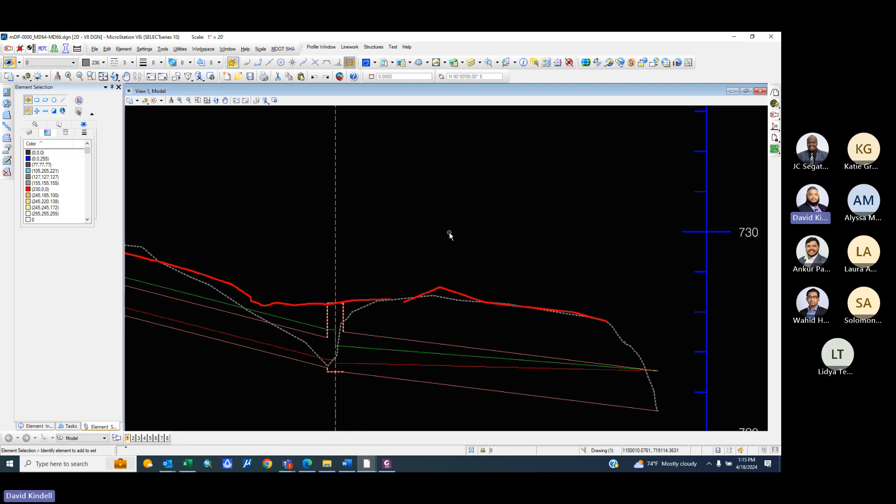Boom, that's it. And then you just adjust this, adjust this, and then you can select all your things here and rotate them, like 90 degrees, and center. So now you have your profile labels and everything. You should name your profile label. You want to change your existing to gray. Basic profile stuff. I'm not going to get into adding callouts, which is pretty standard.

So this is the profile. I did all that annotation in just under an hour and a half. And if you have a lot more profiles, if you set up your database and everything, the profiles will come as fast as possible. Alright, the last thing I want to focus on is structure and pipe schedules and how to do them. Usually we have to provide structure schedules and pipe schedules. And you don't need a toolbar for this.

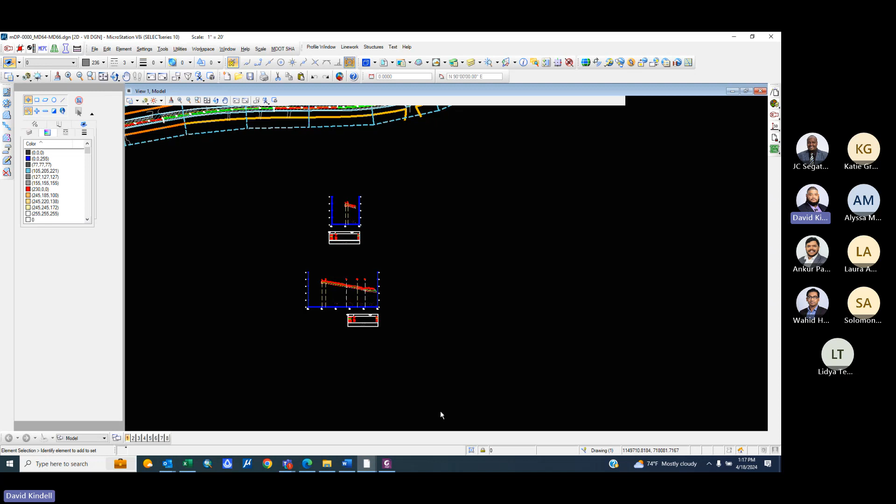What you need to have is a LandXML file and an alignment that you need. Okay, so the way you do it is I'm going to take the highway alignment here. And so what I do is I go to my toolbar here to the right, and I choose... No, now I do need to open up to create the LandXML, which is the LandXML translator.

So I'll just open up my tool, example project. And you can use any folder that you want really. It's not going to be saved in a CAD folder. It's going to be saved here. I already have it here, but I want to show you how to do it. So you can use this LandXML for structure schedules, for stakeout tables, LD stakeout tables, and everything.

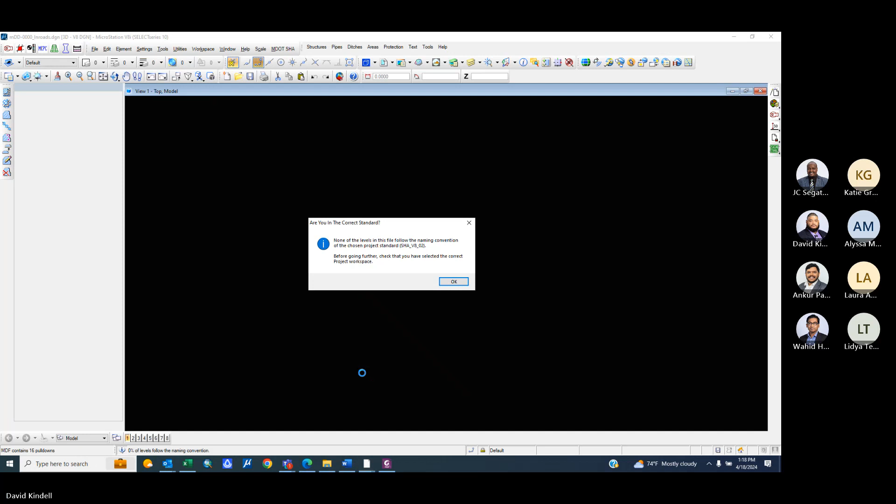Did I open it up in my conversation? I must open it up in InRoads. Power mode. So now, bear with me. I want to open it up. Land file translators, LandXML translator. I want to import the export alignment.

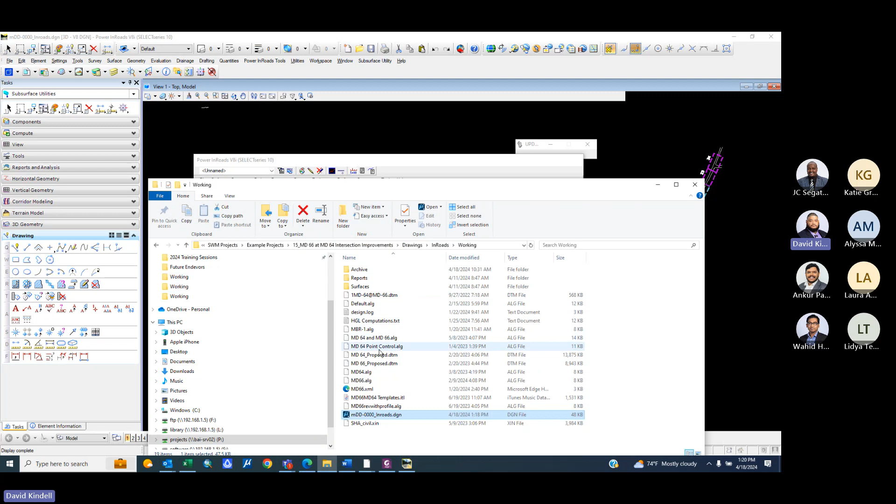Now I want to see what alignment I have. And I already have this highway alignment located here. So I will use this alignment, and then let's make sure it's the right alignment. Turn it off. Let's just go to view geometry. Okay, that's the right alignment. We're good to go.

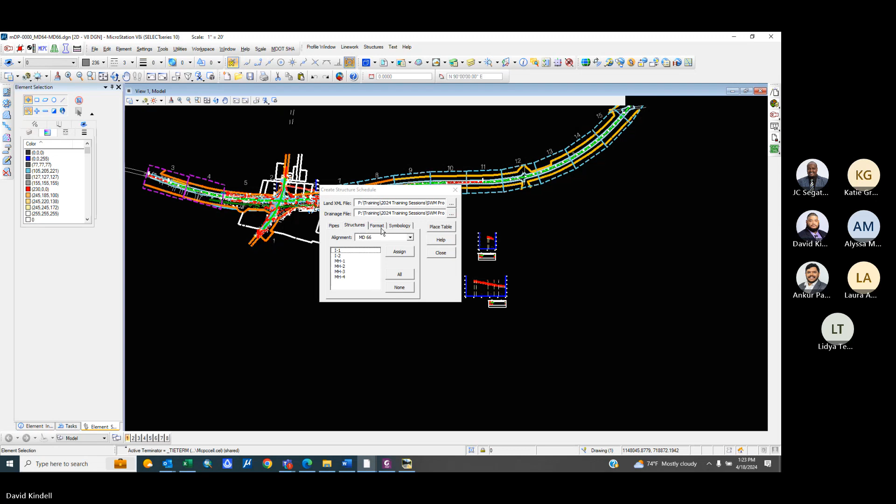Going to choose my format: offset, elevation, pipe, and precision 0. I want to choose my elevation precision to be 2. And then basically what you're going to do is format symbology. That's okay. And then you can select all pipes and all structures.

So right now I'm just doing the pipe table. There's your place table. Now you have the pipe schedule, the type and class, all set and ready to go for you. Invert in, invert out. And then structures, place table, boom. You have the structure schedule all ready to go.

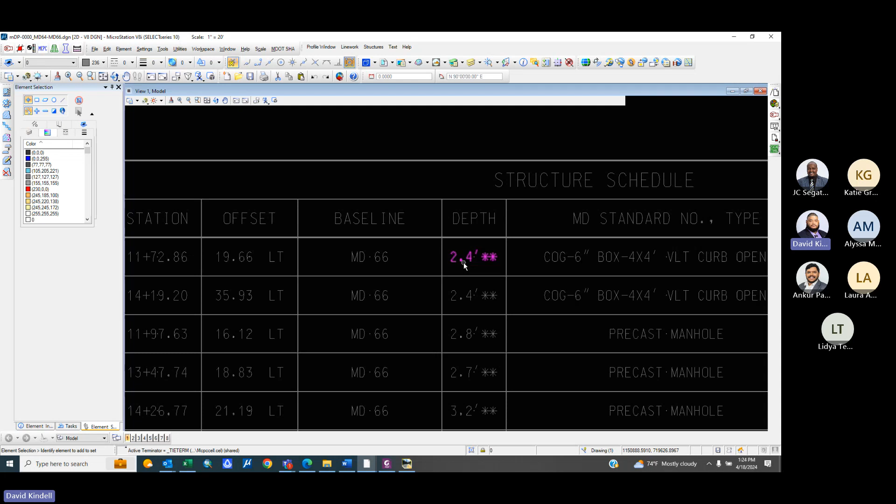The structure, you may have to adjust it a little bit. It'll use your baseline. And that's it. That's easy peasy. You don't have to type it in. That's all for you, and put it in your plan sheet. So we did all this. We did 245, we did HGL, we did structure schedule, all in under an hour and a half.

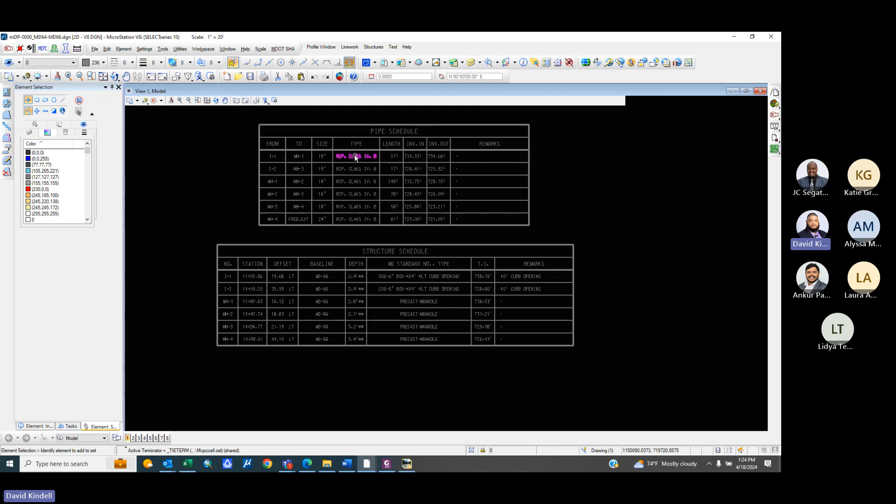And then later you're going to do your callouts, finishing, making it look nice and pretty, your title, existing ground, proposed ground, etc. Things like that. Alright, so that is the end. That's all I have for you for drainage layout.

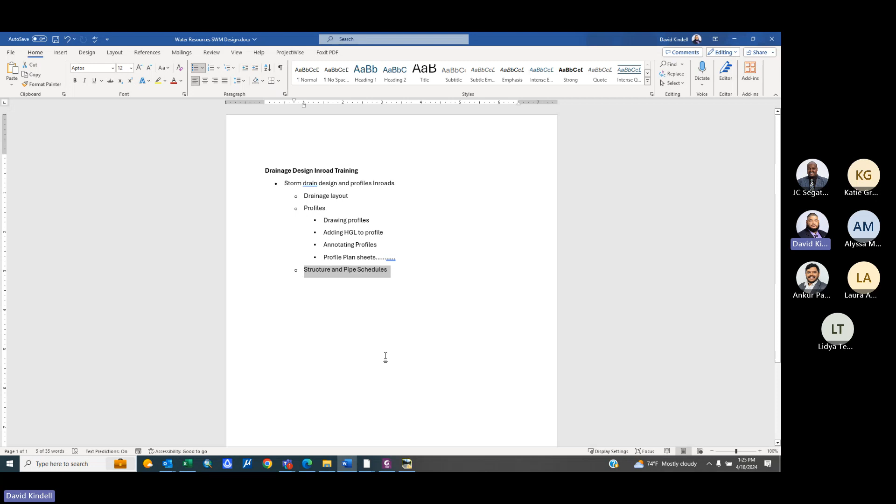Oh, one tip is the database here does not have end sections, end walls, head walls in the database. Those are things you have to draw in on your own. I don't know why. I want to maybe contact them, see if they have an updated DAT file that includes end sections and end walls and everything. But we'll see. But that's it. Does anybody have any questions about using it for storm drain and schedules?